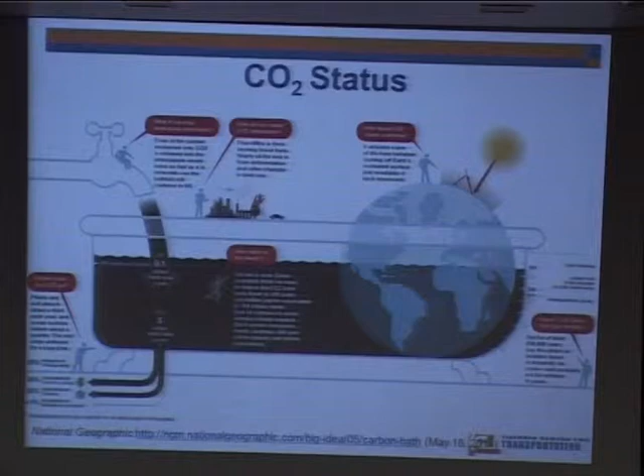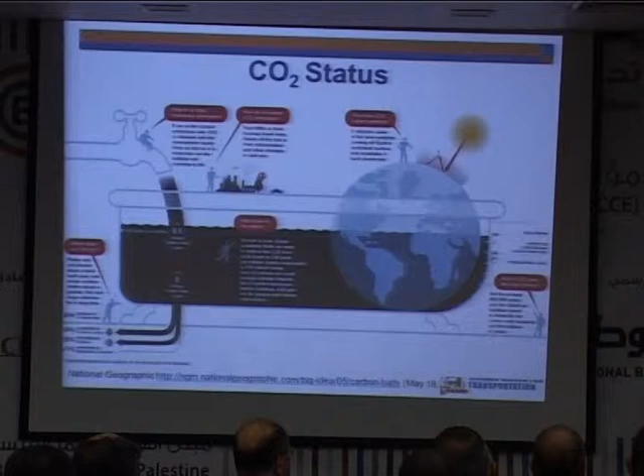If it goes to the atmosphere, it will form a layer. This layer, when the sun gets to the earth, it will reflect this heat. This heat goes to the CO2, and it will reflect it back into the earth. And that's simply what increased the temperature that we have.

So this is the real problem that we are facing currently, and that's what we refer to as global warming, and everybody's talking about it.

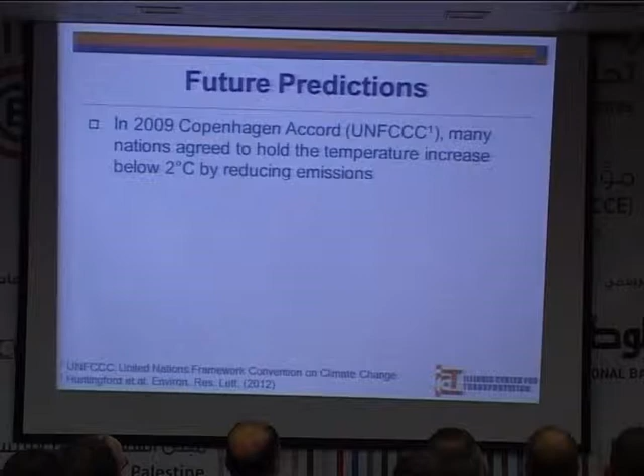In 2009, at the Copenhagen Accord, they came up with a threshold, a limit. They said we don't want this temperature to increase more than 2 degrees. But if we look at the current situation, it is expected that by 2050 we're going to reach this 2 degrees, and this is now going to have a significant impact on Earth.

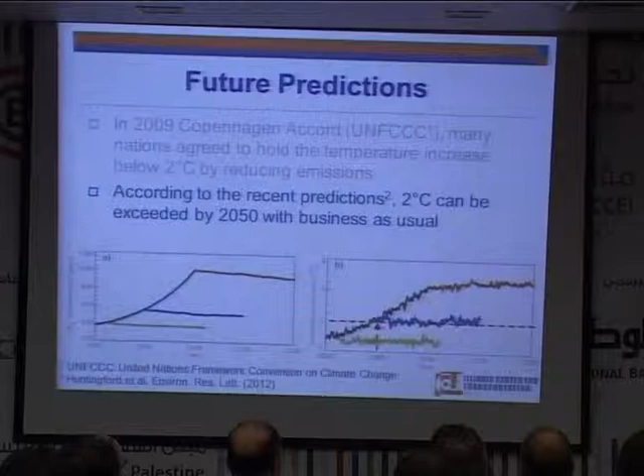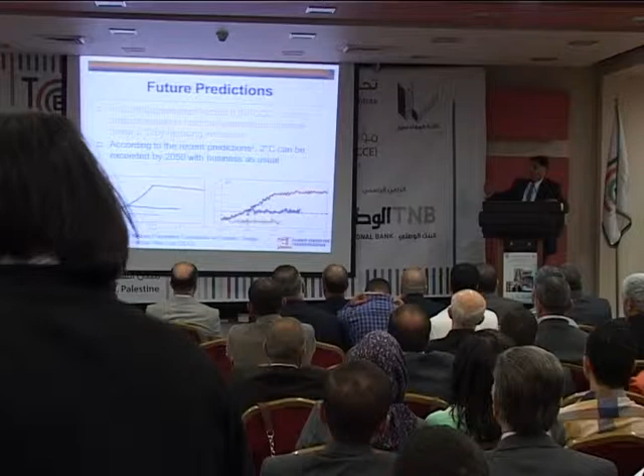So we need to do something. We need to do something in every activity we do, and civil engineers have a lot to do with this, in order to make sure that we can extend this period and not reach the level where the temperature is increasing by 2 degrees.

Before I go any further, there's a lot of discussion about sustainability, and this is the key word everybody's using these days. So what is sustainability? I chose 4 different definitions to share with you. One is to meet the needs of the present without jeopardizing the needs of the future, which means we're trying to keep here a better life for the next generations.

Another definition is an overarching conceptual framework that describes the desirable, healthy, and dynamic balance between human and nature. Then it's a system of policies, beliefs, and best practices that protect the diversity of the planet's ecosystem, foster economic vitality and opportunities, and create a high-quality life. And finally, it is a vision that describes a planet that anyone can live in.

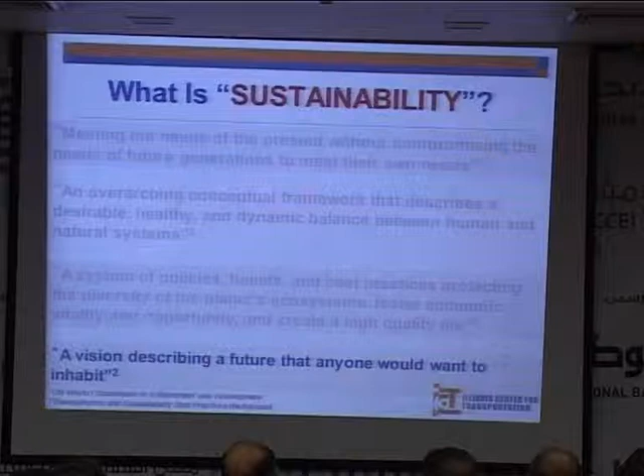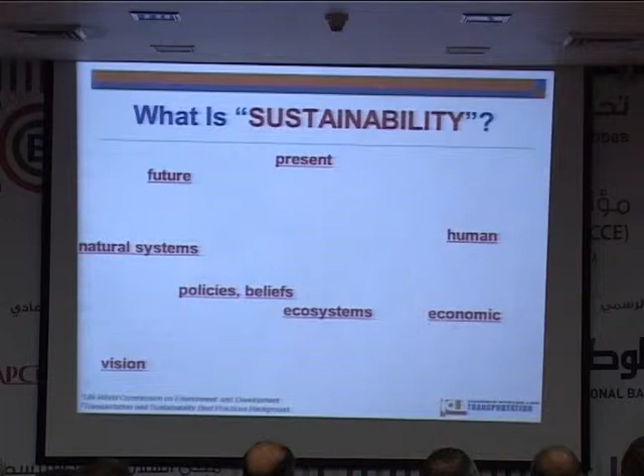If I look at all these definitions, I find these words: we're talking about the present, the future, the human and its relation to nature. We're talking about something to control what we are doing, about policies and beliefs, but the most important thing is the ecosystem and economics. Anybody talking about sustainability that doesn't provide some economic advantages, nobody's going to use it. So let's be frank about it: it must also provide some economic advantages, and in order to do that we definitely need to have a vision.

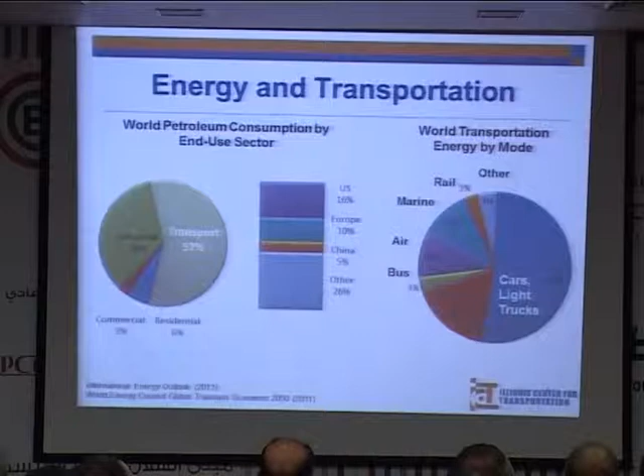Transportation is definitely a key part of this. If we look at transportation, usually we are using around 40% of the energy. But if we look at petroleum-based energy, transportation is usually around 57% of all the energy coming from petroleum, which means this is a significant part. So transportation is really a main cause for the emissions generated around us, coming from the different modes of transportation—cars, vehicles, rail, ships, and so on.

And then we have a different impact on the environment. Whenever we have congestion, we have more emissions that go into the air.

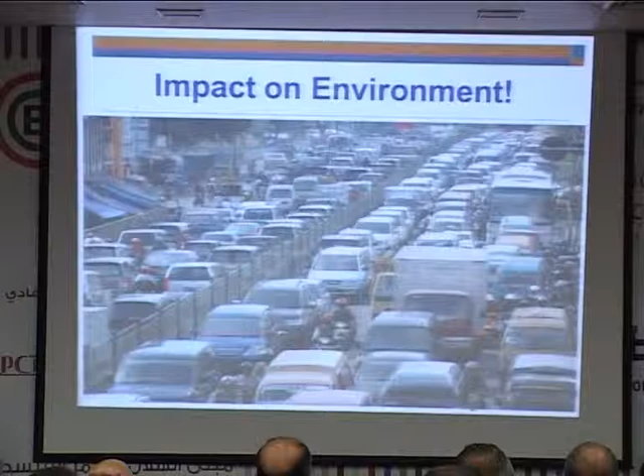Actually, I always think that the needs of the people are usually three: you need to eat, you need medicine, and you need to communicate. That's human being's needs. If we are talking about food, you need to transport it from one location to another. If you need to go to a hospital, you definitely need a vehicle to take you there. And if you need to visit somebody, you need transportation. So transportation is very, very important for a human being.

But along with that, there are disasters happening, because with the petroleum that we are using, there is emission that comes during the process. There's also emission during the mining. All this is creating some pollution, and even sometimes it gets worse when there's a spill of crude oil, which a lot of you are familiar with.

But there is another thing which is really important: we have reached the point we refer to as the peak of oil production.

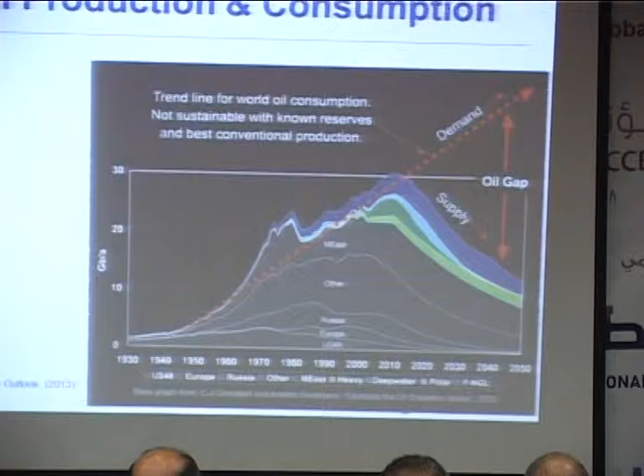A lot of people think that there is a lot of oil, but the truth is, for example, Saudi Arabia, it costs them 1 barrel of oil to produce 100. But if it starts costing 1 barrel to produce 10, then that country might not produce oil.

So now we are at the peak, and this peak does not mean there is no oil. Some countries do have oil, but it's so deep they cannot extract it. We are at the moment now that we reach that peak. A lot of the oil close to the surface is almost gone, which means the demand and supply dynamics are different these days.

This is the curve usually referred to as the Hubbert curve. The Hubbert curve is one of the curves dictating or telling us that we reach this peak. Some countries, as I said, have already reached that peak.

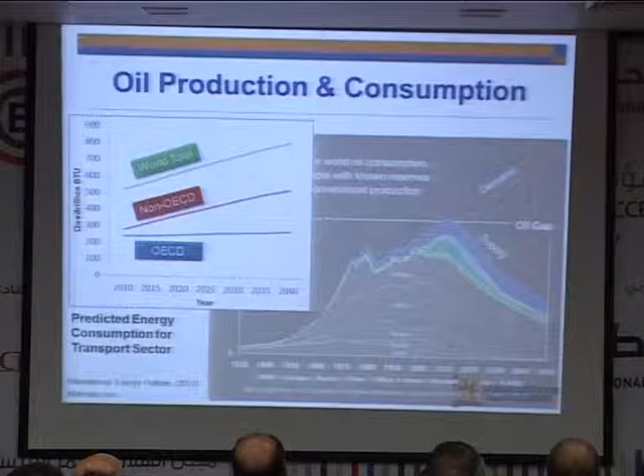But this is more affecting the third world countries, because they're going to be using more oil. Even developed countries now are using some alternative energy methods, but they're still going to need oil, though it's going to be almost flat, while you're going to see the increase in the third world or non-OECD countries.

So why are we talking about transportation here? It is the cornerstone for any economy in any country. Actually, for any product you are producing or importing, 1/3 of that cost is due to transportation.

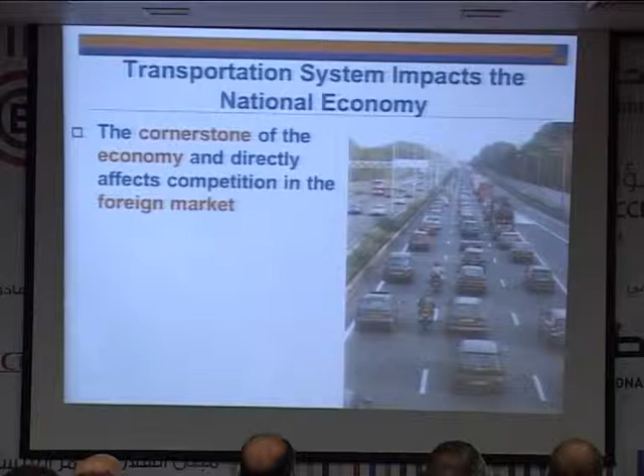This is something we can discuss later or expand on. So transportation supports the GNP in any country. In some countries like the United States, 10% of their GNP is transportation. So it is very important.

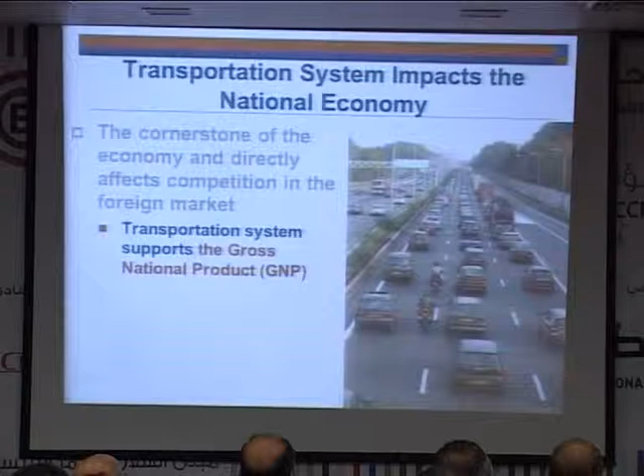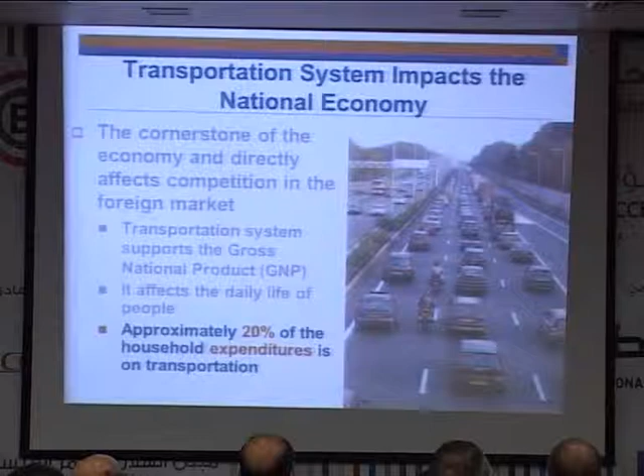It affects the daily life of people, and if we look at any household, almost 20% of what you are spending on average goes into transportation. So this is very important.

But we also need to look at it as an integrated system. If you have a transportation system that gets congested, that's going to cause delay, that's going to cause more emission because of standing, and that is going to require more energy. When you have still-stand traffic or slow traffic, it does more damage to your road.

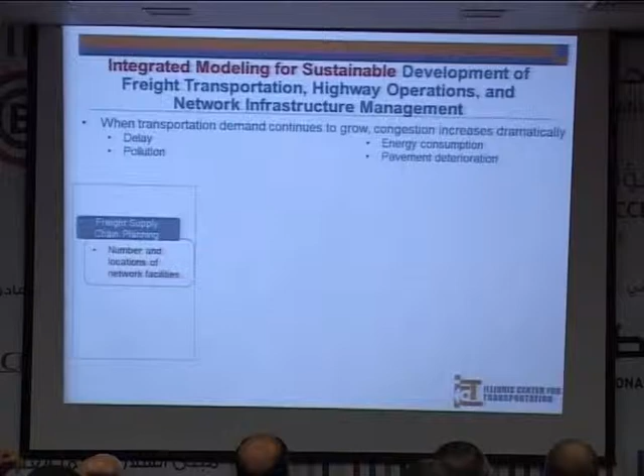So let's assume there is a company producing a product and trying to ship it. When they ship this product, it goes to a network, and this network is shared by the public. You have to have a balance between the two.

If you get this road deteriorated or having a problem, then we're going to have some delay in the shipment. If you get this delay, you're going to get some congestion. If you get congestion, the shipment will not go to the place it's supposed to. So in a very simple way, you are having an imbalanced system that affects the economy directly.

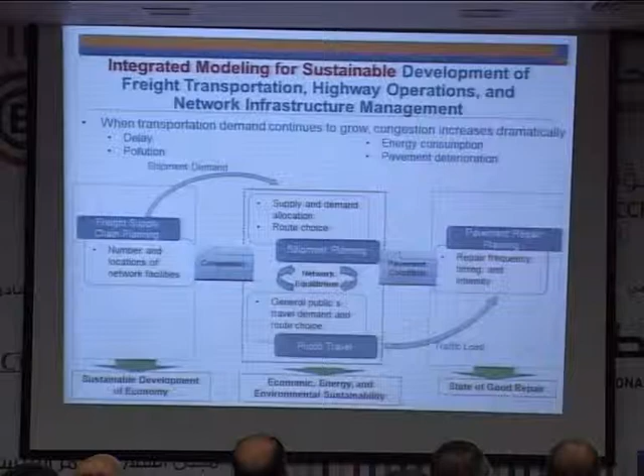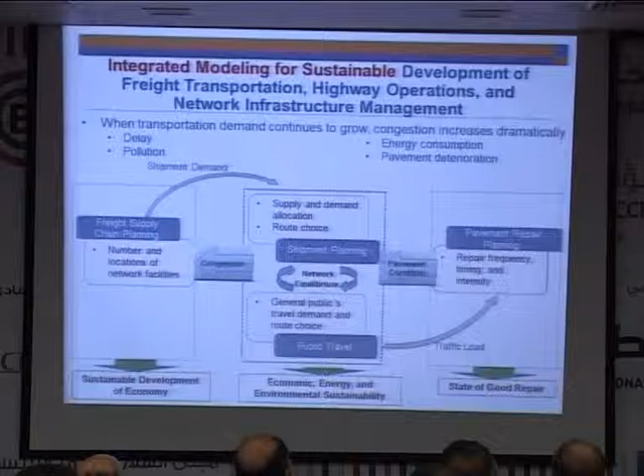So if we look at the first phase, we have to have a sustainable development of the economy if we are able to ship products from one place to another. If we look at the balance in the network, we are looking into economy, energy, and environmental sustainability, and having the road in a good shape. That's what we call the good state of repair, or state of good repair.

So in transportation, when we talk about sustainability, we're not just talking about trying to use recycled material, we are talking about everything. We are talking about research, long-lasting roads, planning to do repair and maintenance on time. So all of this comes together in order to have a sustainable system.

So sustainability does not mean, under any circumstances, just doing recycling, although I'm going to be talking about that here in a little bit.

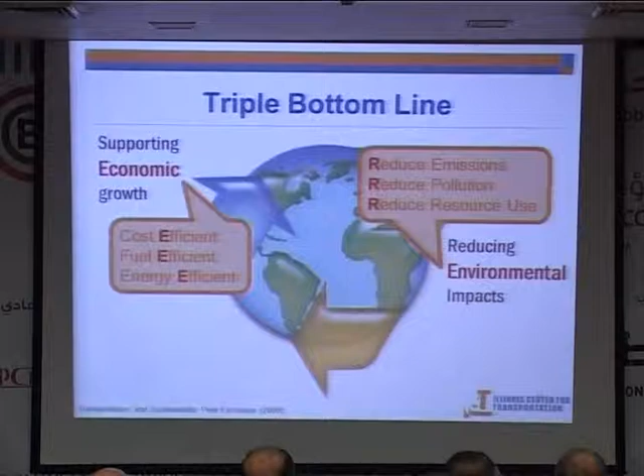So we have 3 points that we usually need to keep in mind. First, it's got to provide some economic advantages, which means you have to have cost effectiveness, fuel efficiency, and energy efficiency. As to the environment, it has to reduce emission, pollution, and natural resource usage. And for society, it must provide safety when you're driving on a road.

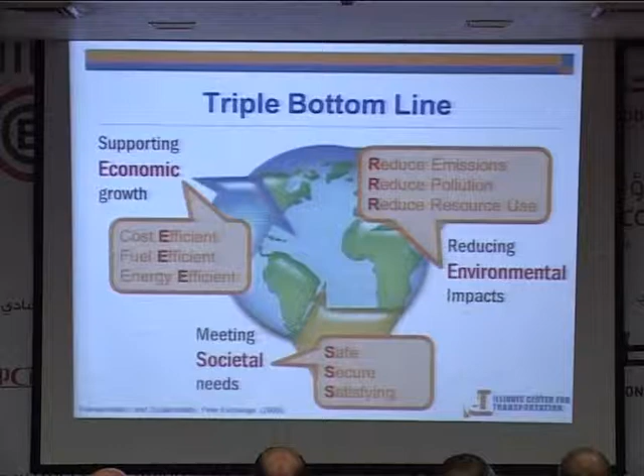You definitely don't want a hazardous road. You need to make sure it's secure and satisfying, which means the user of that road is definitely not feeling bad when they are driving.

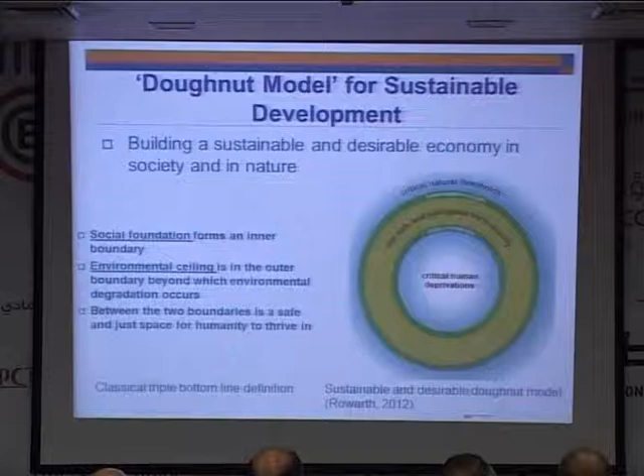All three of these are well connected, but I always like to use what we call the donut system. The donut system has two boundaries. One boundary on top, which is the environment. We want to make sure the environment is safe and not degrading.

And you have the bottom boundary, meaning the human being is not affected, which means you don't have, for example, polluted water. This is unacceptable. So in order for a human being to live in a good way, you need to be between these two boundaries: the top boundary, that the environment is in good shape, and the bottom boundary, that human life is definitely going on the right way.

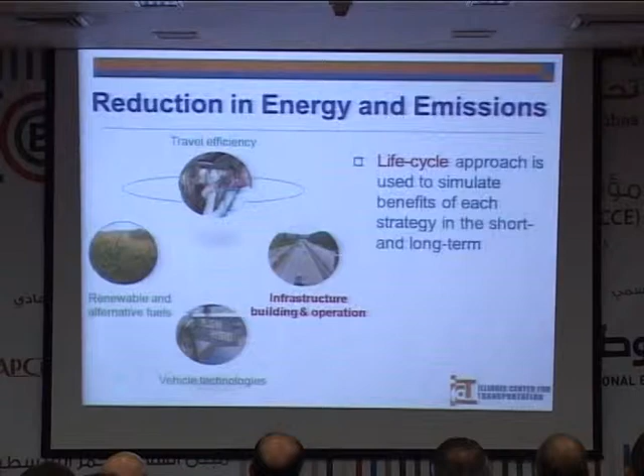So in order to reduce the emission and the use of energy in transportation, we're looking into four different areas, and I'm going to focus on the one that I do a lot of work in: traveling efficiently, looking into renewable energy and alternative fuels, and vehicle technology.

Some of the vehicles, I'm sure you're all aware of now, are completely autonomous, which means you don't even need to touch the steering. They just drive by themselves. The only reason it's not in the market is because of the cost and human mentality, but the technology is already there.

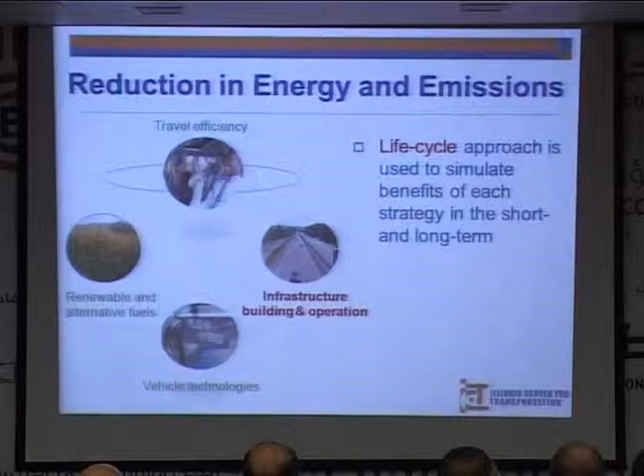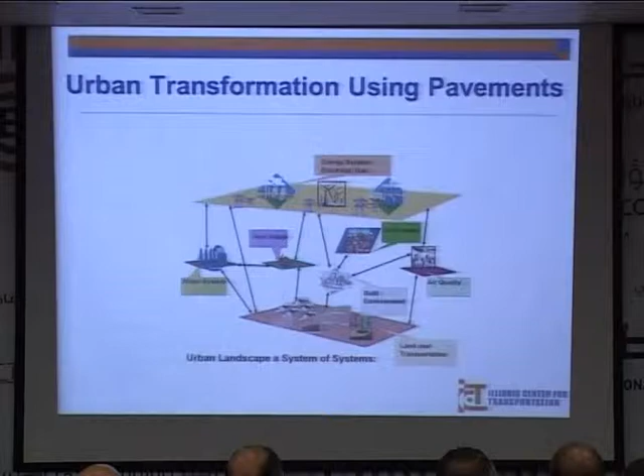And then, of course, the last one is the infrastructure, which includes the building and operation. That takes us to something we refer to as the systems of systems. If we look at energy as a system by itself, and urban transportation as a system, these two systems are interacting with each other. I'll give a few examples. One is producing the energy, regardless of what it is, whether from a power plant or nuclear plant. And of course, you have the urban transportation, including the building and the infrastructure.

A good example: I can produce energy by having pipes in my pavements. During the summer, when you have heat, these pipes will heat the water. This water will go to storage, then to buildings, and that will definitely save us a lot of energy.

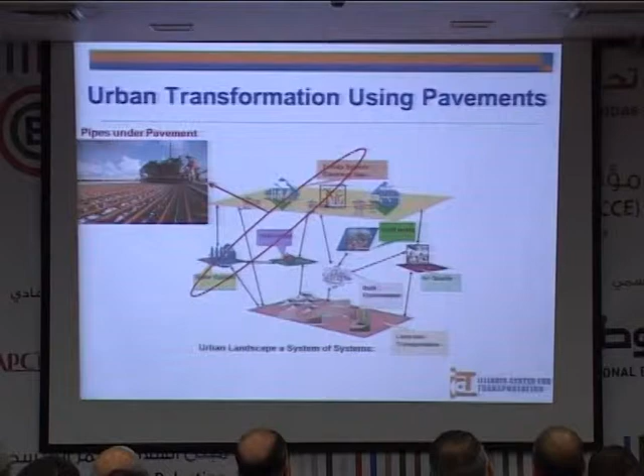I also look at porous pavement. Porous pavement means it will keep the water unpolluted. The water that goes to the first layer of the pavement will just be taken to the drainage system, and that's another way to keep clean water.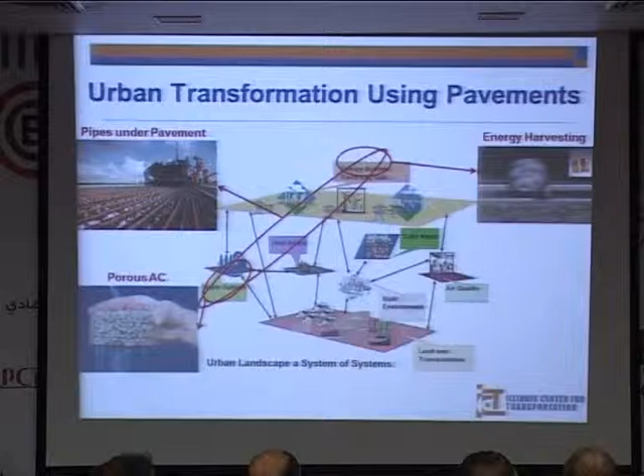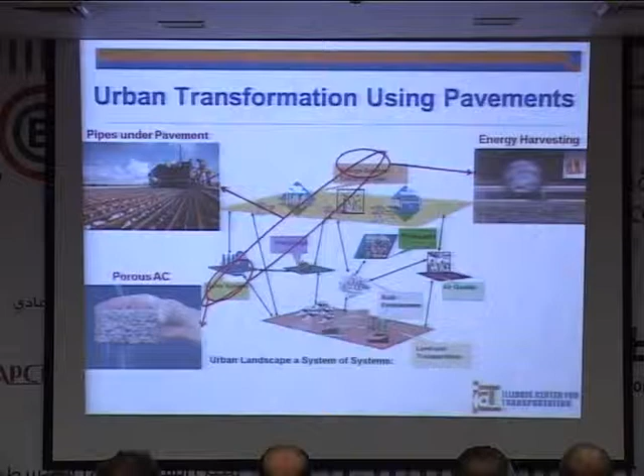Also, we look into energy harvesting from the pavement itself. If we put piezoelectric material in the pavement system, as your vehicle passes over it, the vibration creates energy. This energy can light the bulbs in the street, so I don't need to get energy from somewhere else. This is harvesting energy just from traveling over that pavement.

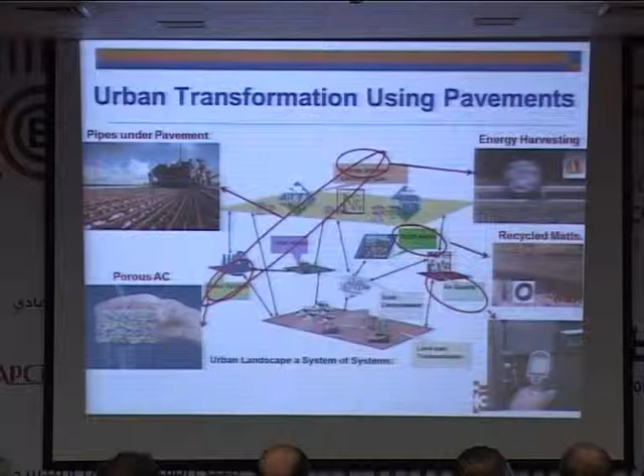Then we can reduce hazards, which I noticed in the conference there are people talking about the safety of workers. It's very important that we reduce the temperature of the asphalt by using warm mix - I'll talk about this a bit. And also we can use recycling, which is a big area too, discussed here today. So let's talk a little bit about recycling.

There are many things we can put in the pavements, including reclaimed asphalt pavements and tire rubber. If you look at the tire in your car, believe it or not, it has 32 components in it. Some of these components we can definitely use in our pavements because they contain polymer or copolymer that provides SBS or polymerized asphalt that can improve the road we're driving on.

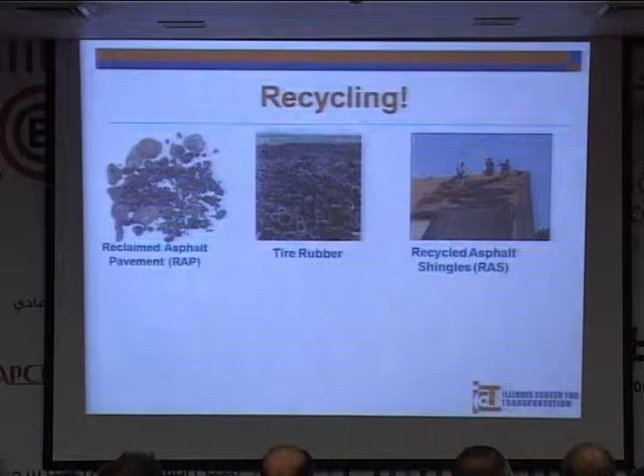Shingles - we don't have that much shingles here, but that's a very rich material in binder that we can take from roofs and use in pavements. So by maximizing recyclable products, we can now help the environment while at the same time save money.

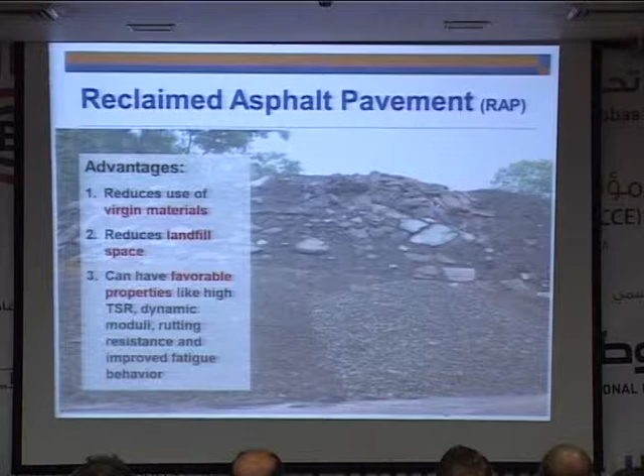So let me expand a little bit here about recycling materials or reclaimed asphalt materials. There are many advantages for this. First, in a place where natural resources are limited, that will allow us to replace the virgin materials.

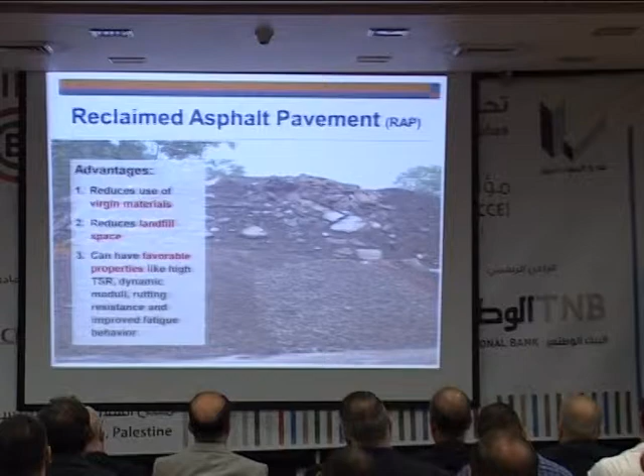Not just here, but everywhere, you have a shortage in landfills. At one point, this is going to be filled, so this is one way to reduce the landfill. We can also engineer these products to make sure they perform like any other roads, or even better. That's where the engineering becomes important.

I always tell my students that the difference between an engineer and a non-engineer is that the engineer does the right thing, but also saves money. Anybody can design things, but not anybody can design the right thing while also saving money. That's very important, and I'll repeat this more than once: if we don't have an economic impact, people will not be using recycled materials.

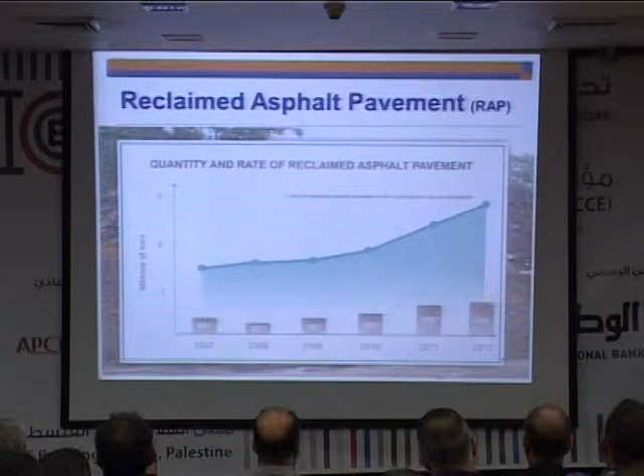If we look at the trend now of using recycling in asphalt concrete, it is definitely increasing significantly over the years. It's a very simple process.

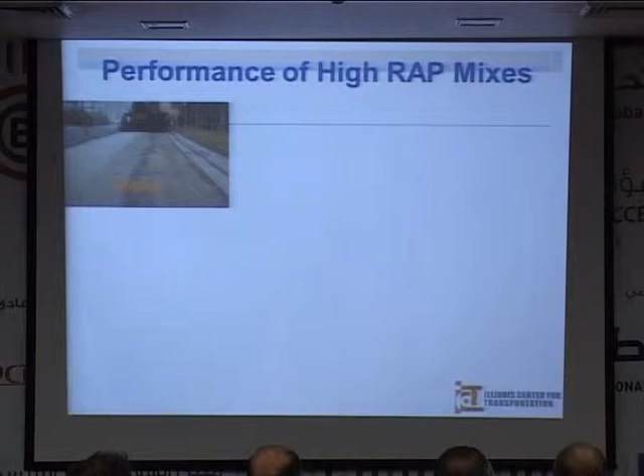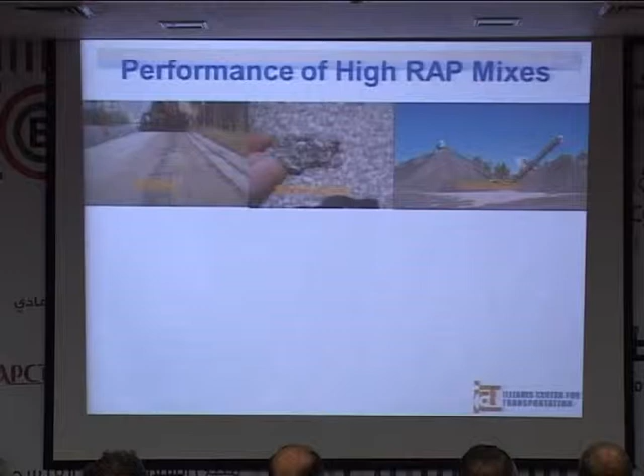You mill the road - even in Ramallah you can see that, some roads already milled, I think for hazardous reasons they have it. You mill the road, take this material out - here's a particle, it's usually still coated with asphalt. You put them in stockpiles. Instead of using just one stockpile, you fractionate it, putting them in different piles, and that will make the quality much better in a very simple way.

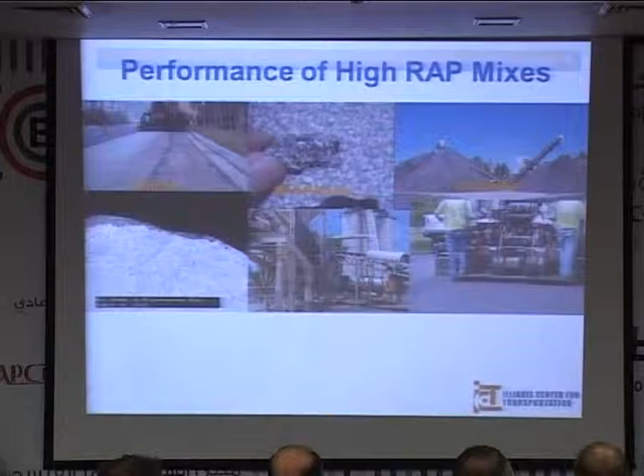We need to make sure we calculate how much asphalt is in the existing material. We need to understand that when you use recycled material, sometimes it blends, sometimes it doesn't, so this is something we need to know before we start using this technique. Then in the plant itself, we need to know where to add it - that's very important. And then you have the paving process.

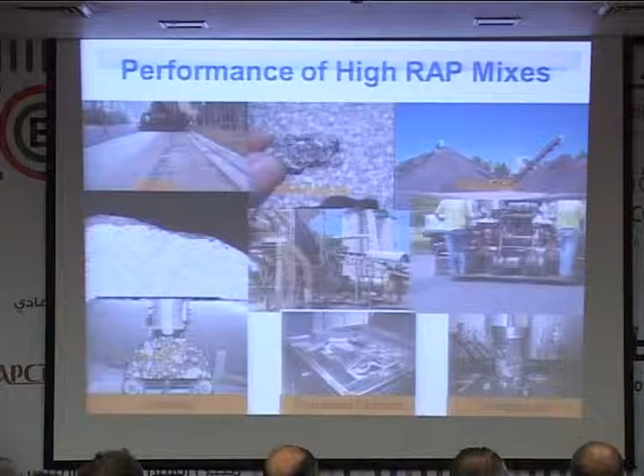After we're done with this, we need to make sure before we put it into the road that we understand the properties of this material. We need to look at the ability or potential for cracking, whether fatigue or low temperature cracking. We need to look at the strength of the material, what's the modulus, how it's going to react to the impact of temperature and vehicular loading - these are some of the tests we do.

Right now, it is very easy in my opinion, and it is safe and successfully done, to go ahead and include up to or a little more than 50% recycled material, and we can engineer that.

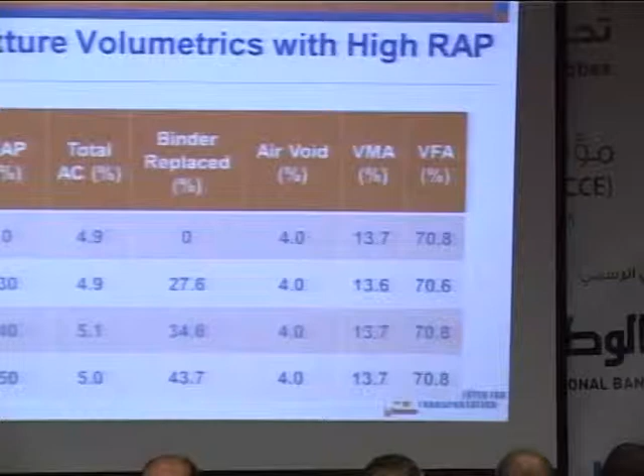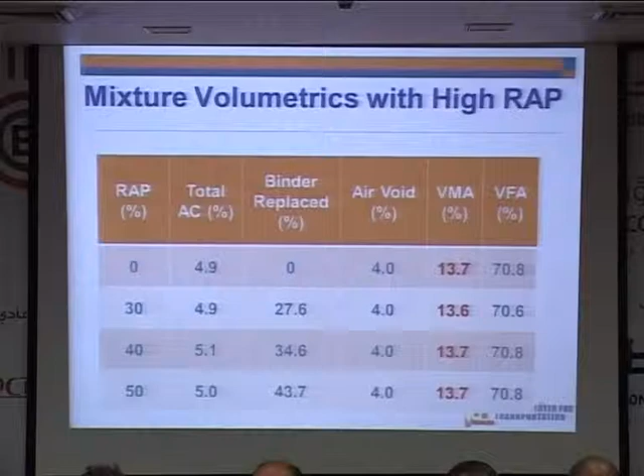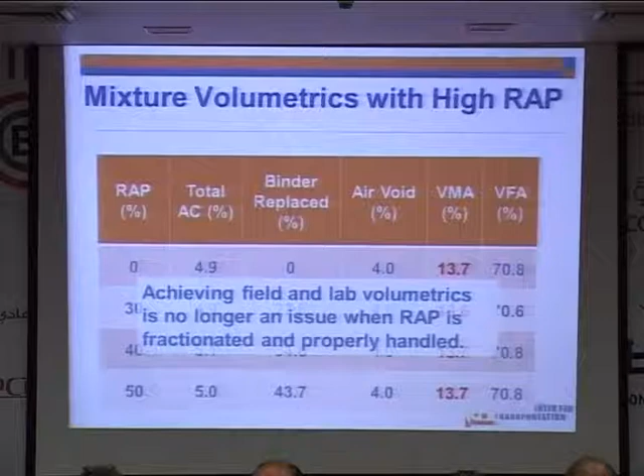The people who deal with pavements know some of the terminologies or parameters here, but the one I wanted to focus on - and that's why many of you who read about recycling usually read successes and failures - is that if we keep something called the VMA, or voids in mineral aggregates, constant, we can add different percentages of the recycled material and achieve a good design. So it's a very simple approach sometimes, but people may ignore it during the process of building the volumetric. This has been recently published in some of the work we've done at our lab.

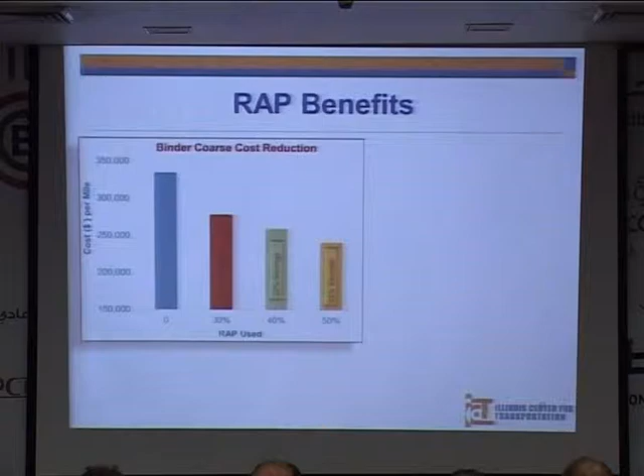Away from this, let's look at some of the advantages. The cost is less, so we have economic advantages. Energy - I'm using less energy, and I'm having less impact on the environment. So I can achieve all three of these when I'm using recycled material, if I'm using it correctly.

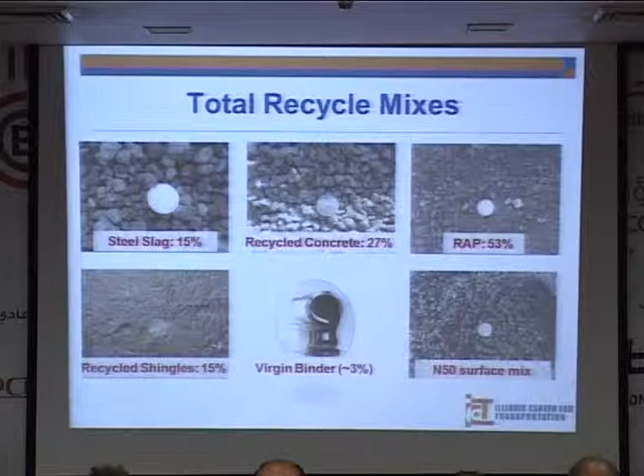Last year we had a project we call the Total Recycle Mix. This one has completely recycled material with the exception of 3%, which is the binder that was used. We used steel slag around 15%, recycled concrete around 27%, RAP around 53%, and it was fractionated into different sizes. Recycled shingles, which are very rich in binder, and we used just 3% of fresh binder. From that we got a good mix.

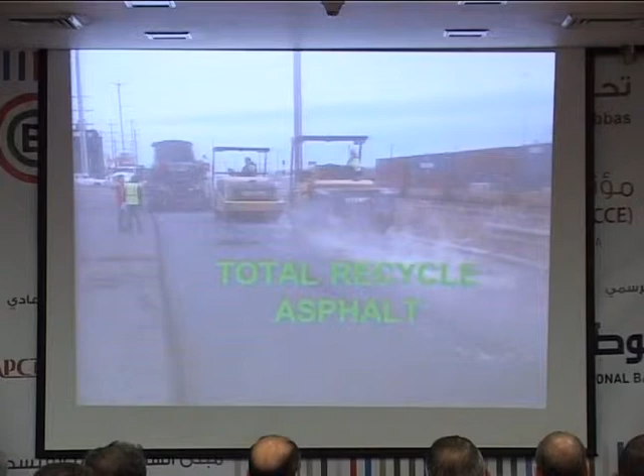This mix is in place and already built. So here you have almost what we call total recycled, because you have complete recycled materials except the 3% of asphalt. And the 3% asphalt you're adding is usually very, very soft asphalt, in order to make sure there's no brittleness in this material.

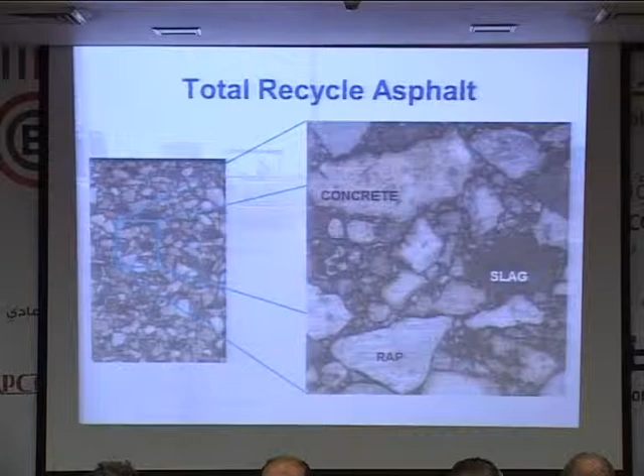This is how the mix looks like inside - you can see the pieces of concrete, the slag, the RAP, all together very nicely interlocked. But the most important thing is that we're getting a very stiff mix, and that's again where the engineers come in. The engineers make sure this mix is not too stiff, because if this mix is stiff, it's going to crack.

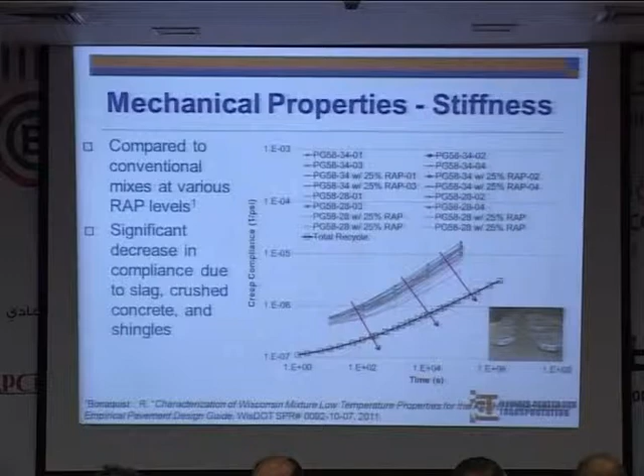So in order to prevent this mix from cracking, we use a softer material to bring the curve up, which is here, the lower curve. This is a creep compliance, and you don't want it to be very low, because if it's very low, this means the material is stiff, so we need to bring it up by using a softer binder.

Also, as we are looking forward, we're looking...